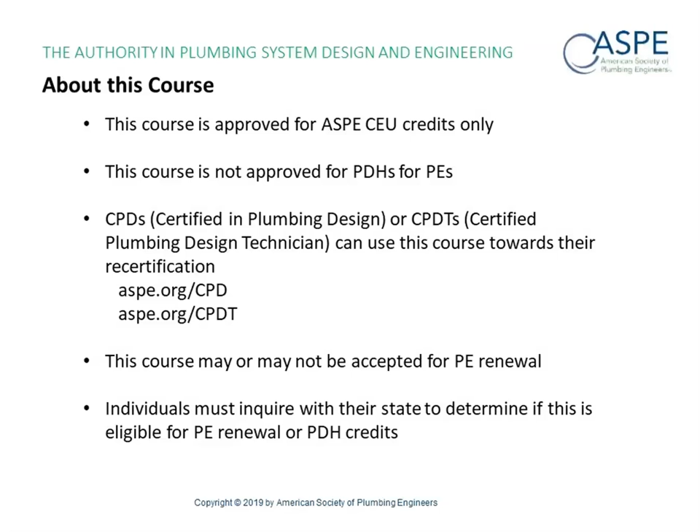So our objectives today: I'm hoping that by the end of the presentation, you're going to be able to list the major causes and consequences of food contamination, identify the primary considerations when selecting drainage for a particular application, analyze and evaluate the performance of drainage materials, describe the unique advantages and benefits of the stainless steel push-fit drainage system, and be able to compare the cost-effectiveness of cast iron and stainless steel drainage solutions.

Go ahead and advance, Jimmy. Jimmy, you want to take this one? This is kind of your baby right here, but I'll be happy to discuss it if you'd like.

Yeah, I think the overall message here is we're talking about hygienic drainage, right? We're not talking about storm drains. We're not talking about standard commercial applications, but rather something that really affects all of us. Everybody on this call is impacted by the subject.

And what we've learned over our time in research is that food contamination is a serious problem. Food contamination affects everybody. 1 in 6 Americans get affected by some kind of food bacteria, food recall, and hundreds of thousands of people are being hospitalized, and thousands of people die because of bacteria in our foods.

And what we're going to talk about today is what that is, where it's coming from, and how we mitigate the risk. Everybody on the call either knows someone or has been affected by food poisoning, bacteria in our food, or some other circumstance. And so it's a problem that kind of affects everybody. So we're going to discuss what that is and how we can prevent it.

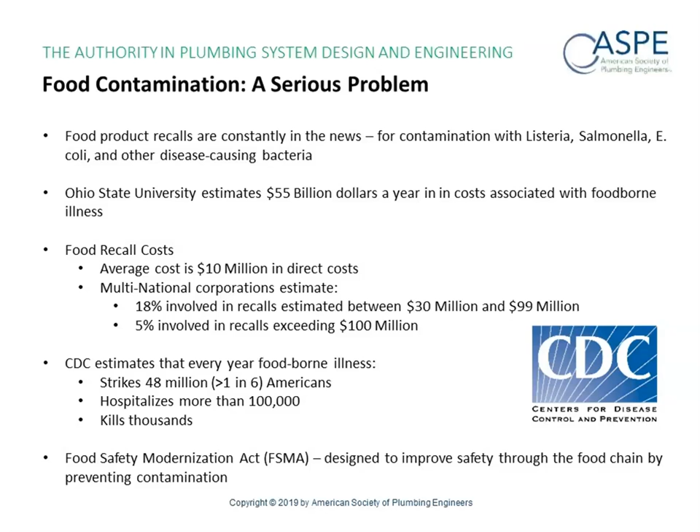Okay, so there's several codes and authorities that have their hands in the cookie jar here. NSF, which we carry the NSF 14159-3A, which is a very stringent requirement for the design of meat and poultry processing equipment. There's HACCP plans in place at most of the food processing facilities. The UPC has taken this, the IPC as well. We already touched on the Food Safety Modernization Act.

Pipes and fittings and drains, you have to comply with the ASME A112.3.1 and ASME A112.6.3. And then we have the ISO 9001. Now, the ISO 9001, in my previous life, I didn't think was a big deal, but that really has to do with continuity of manufacturing. An example would be a particular manufacturer of a type of pipe where, upon closer examination, the outer diameters have variance in them, so they would not connect to the drains properly. So you really are looking for a certain level of continuity when you're dealing with a product. So look for that ISO 9001 wherever it's applicable. Go ahead, Jimmy.

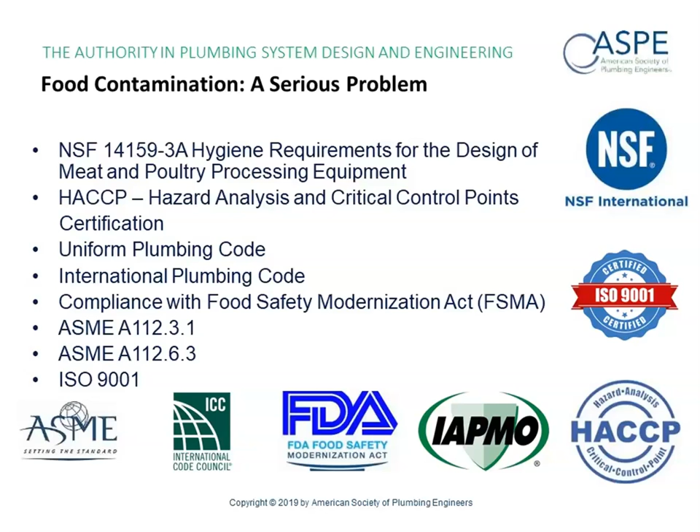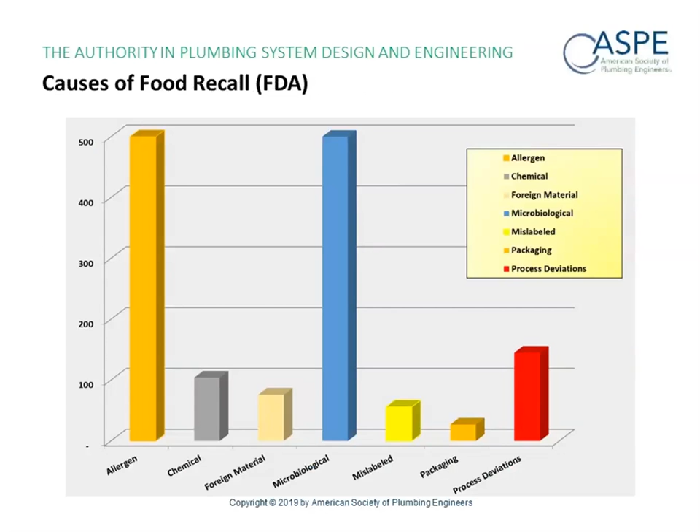Okay, so looking at this chart, you can see that the two leading causes of food recall by the FDA are due to allergen or microbiological contaminants. Now, when we're talking about allergens, that could be something as simple as an undeclared peanut oil or undeclared dairy product in the packaged food. Microbiological is a far more serious problem, so we're going to advance and talk more about that. But before we do, we have our first poll question, one of 5 poll questions that Greg is going to conduct in the WebEx.

Yes, I'm pulling it up right now. Great. So the question is, what is the leading cause of food recall in the United States? Your options are foreign material contamination, allergens, microbiological contamination, or process deviation.

Oh, I got the vote. That's cool. Hopefully you're right. No, I guessed wrong. I wanted to skew the results. Okay, we'll give it about 5 more seconds. All right. Greg, do you want to share the results? Yep. Close the poll here. The WebEx is just giving it a few more seconds. No worries. All right, I'm going to share the results now. Okay, there you go. All right. So

The answer is C, microbiological contamination. So 40% of you answered correctly, thank you very much. That is, in fact, the answer.

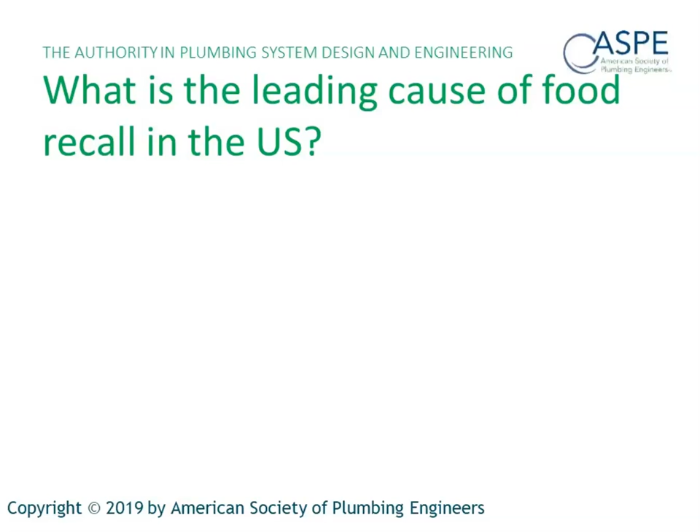Excellent. So 34 of you have just won a dream date with Jimmy Hunt. Congratulations and well done.

So let's talk a little bit about this slide. What we're dealing with here is what is known as WGS in the industry, or whole genome sequencing. I don't know how many people watch the true crime shows at their house, but what they've been able to do is really come up with the technology to isolate and identify the source of food contamination.

So let's say you get sick with some sort of food poisoning, you go into the hospital, a sample is taken, and they detect a pathogen in you. They then run an RNA sequence on it if it's a virus, or DNA sequence if it's a bacteria. And then they are able to take the swab, and that gets entered into a database.

And then there's FDA inspectors and USDA inspectors out in the field that are taking swabs of different facilities. And if they come up with a positive, those are identified, and those are also sequenced in the same way and entered in the same database. So what's happening is they're able now to compare the genomic sequences from these food outbreaks. And what we're finding out is they're able to isolate.

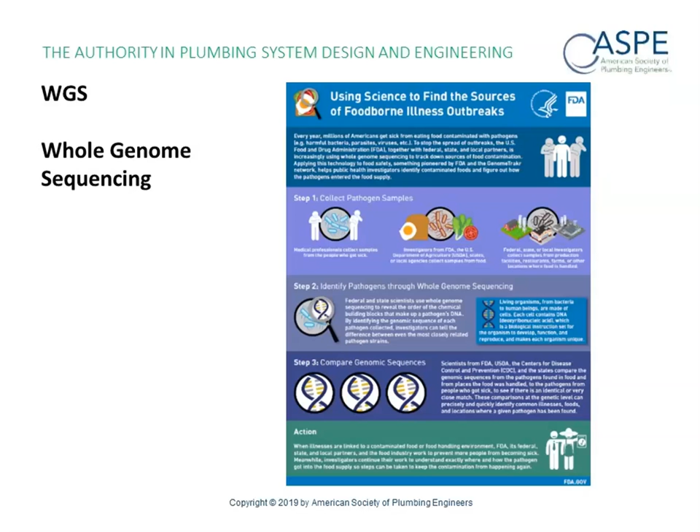So Jimmy in Atlanta gets sick from something, and it actually turns out to be a plant in California. They're able to isolate the source, go back, and then take action accordingly to make sure that that situation is dealt with. So there's really an incredible amount of science and effort going into isolating and making sure that the public is protected. Go ahead and advance.

Okay. So what we're looking at now are the FDA food recalls, which are limited to food, tobacco, medical products, and things of that type. You can see that Listeria in 2018 is still the leading cause of recall through the FDA. The numbers have dropped significantly since 2017. You can see that the number there was 600. And you can see that they've really gone down from 2014, 855, 2015, 647, 2016, 785, 2017, 600, and 2018,

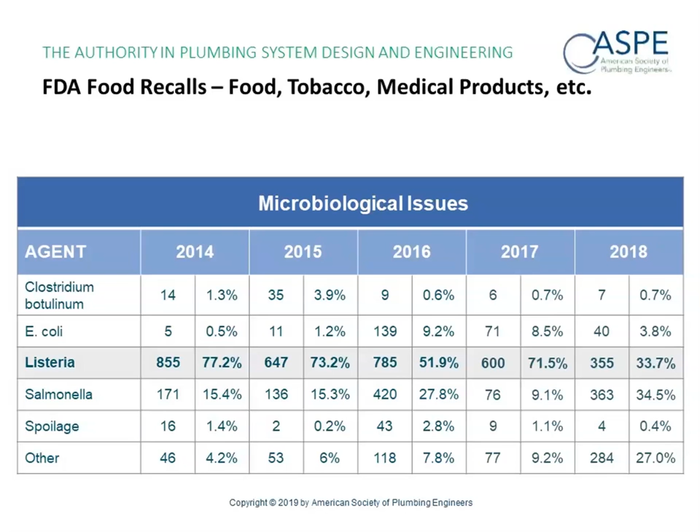355. And that really has to do with the instant identification and isolation of what's been going on in the field. And also, I would say it's a direct result of the HACCP plans, the hazard analysis and critical control points. They're really getting to the point now where we're able to isolate where these things are coming from, what areas need to be cleaned, and what needs attention. Let's go on to the USDA recall and see what they're coming up with.

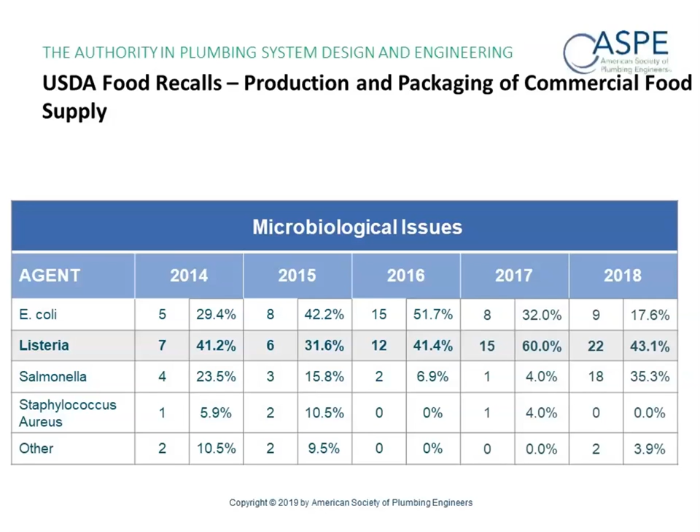And as you recall way back on the first slide, if you're talking a major producer, there have been cases where food recalls have cost in excess of $99 million. That's about 5% of all recalls. Now, that's one heck of a hit for a company to take, and that's how seriously the USDA is taking this. Go ahead and advance this if you don't mind.

So the problem is that when we do this as plumbing designers, and I did this for a very, very long time, is that most of the consideration is what you can see. It's what you can't see that's the problem. Go ahead and advance, Jimmy, if you don't mind.

Right. And as we think about this, where is this bacteria coming from? And obviously it's getting onto the food, but in a lot of studies, the root source analysis shows that the origin of the bacteria is coming from the drain. Go ahead, Scott. Okay. So again, to reiterate that point, the most common harborage site for Listeria is in fact the drainage system.

Cleaning and sanitation programs tend to focus on the obvious food contact areas. So that's when we were talking about FSMA. If you can't see it, it's really hard to clean it. Listeria present in the drains can easily reach food and food contact areas. So what that means is you're basically translocating the source of the bacteria from one place to another.

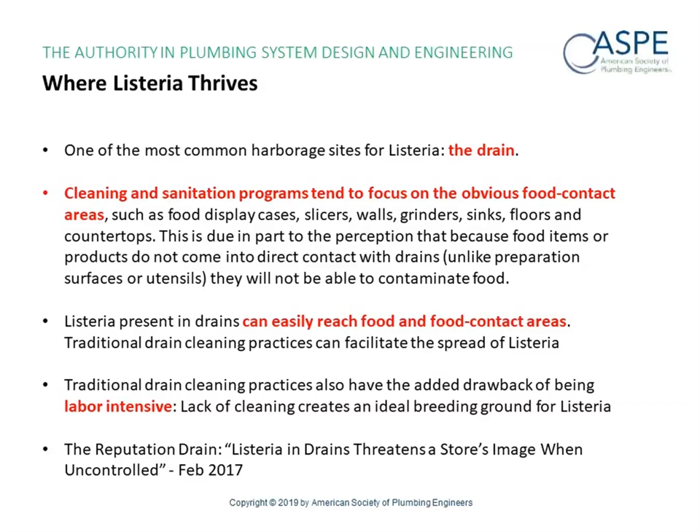Yeah, that gets us to our next poll question. Hopefully you're paying attention. Where do cleaning and sanitation tend to focus on in the typical food production and preparation areas? The answers are sinks, countertops, floors, or all of the above. Where are these cleaning and sanitation people focusing in the typical food production and preparation area? Okay. Poll is open now. You should be able to see it on the right of your WebEx. Give it another 10 seconds. Yeah, and thinking about this question, we discussed the FSMA, Food Safety Modernization Act, and its focus on everything but the drainage.

Okay. Scott, do you want to speak to the answer here? The answer is D, all of the above. Obvious surface contact areas are where cleaning and sanitation tend to focus. They don't really focus on what's underneath the floor. So the correct answer would be D. Let's see what the results should be up now. Excellent. Yep, the results are in. Most people guessed D.

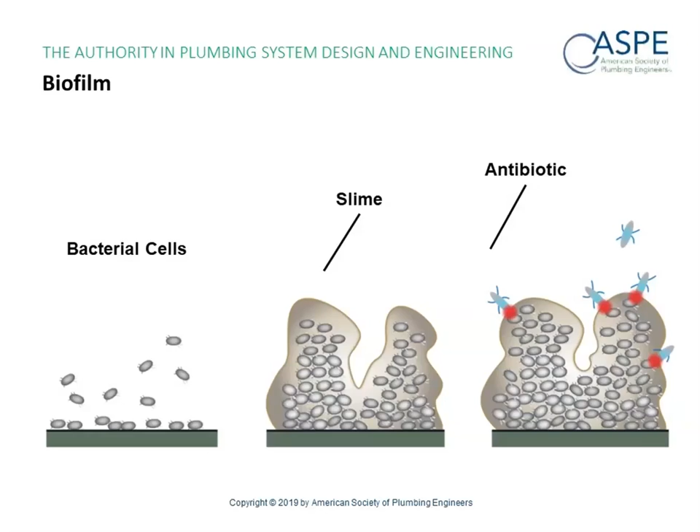Okay, so what we're talking about is what's happening in the piping system and what type of pipe is really propagating this biofilm formation. I do want to preface this by saying that there are other piping systems out there, such as polypropylene and polyethylene. I am working with Watts and some other vendors on trying to get a little bit more data on this to figure out where they fall on the scale in terms of porosity and surface roughness.

I used to think that the coefficient of friction or the surface roughness had most of what was leading to this condition, and I found out that that's not necessarily true. That coefficient of friction isn't always applicable. If you look at a pipe like PVC, which is a great pipe for certain items, it rates very poorly in terms of biofilm formation because it is a very, very porous material.

Second to that, you have asbestos cement and cast iron. Rating somewhere about there is galvanized steel, and then we know that stainless steel 316 in particular rates excellent in terms of the resistance to biofilm formation. And that has to do a lot with the metallurgy and the fact that biofilm does not like to grow on stainless steel. Can it grow there? Absolutely. If you don't clean anything long enough, you can be subject to problems. But just from a material standpoint, it's just not a very hospitable environment for it, which is why it's used.

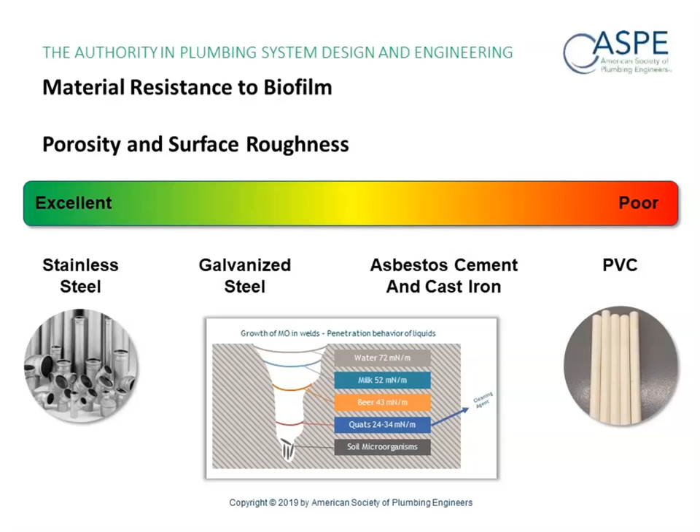I think on the next slide, we have a blow-up of that graph that's on the bottom of this page. Can you advance one slide, please? There we go. Okay, so what are we talking about here?

We're talking about the growth of microorganisms in welds and or crevices. So the rating scale is millinewtons per meter. So if you're looking at a weld seam or a pore in this case, you can see the water penetrates to 72 millinewtons per meter. Milk penetrates deeper than that at 52 millinewtons per meter. Beer, which I'm recommending as a cleansing agent, just not in this, but beer is penetrating to 43 millinewtons per meter. Quats, which is a cleaning agent, gets down to 24 to 34, which is not enough to penetrate deep enough to reach the soil microorganisms.

And the source for this is the EHEDG. Jimmy, what does that acronym stand for? That's the European Hygienic something. Are you familiar with that one? It was a seminar that Mark Hayden went to.

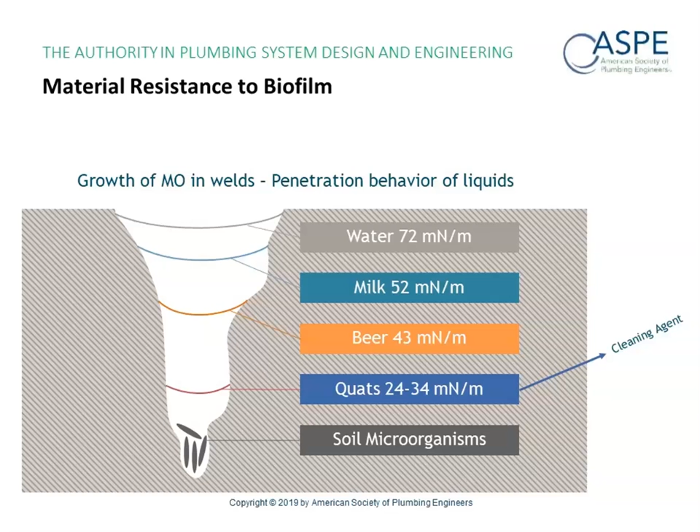But basically what it shows is that the cleaning agents are not getting deep enough penetration to kill these soil microorganisms. So just because you foam, just because you cleanse the pipe or try to disinfect the pipe does not mean you're actually taking care of the issue. Let's go ahead and advance. All right. Unfortunately, this was a three-part click, but we've already clicked through it.

Recent studies have shown that there is an expansion rate of about 4 millimeters per day on that, which means that that bacterial colony is actually propagating and spreading throughout the piping system, and it can literally start in one area. And this is what we're talking about in healthcare. This study was sent to me yesterday, and it came out of Europe, and it says that only 4% of the hand sinks that are provided in the healthcare environment, in the clinical environment, are actually used for washing your hands. So what's going on? What are they being used for? Well, they're dumping biological waste down those sinks, although they're not supposed to. They're dumping leftover food, and what you're doing is you're providing nutrients for that.

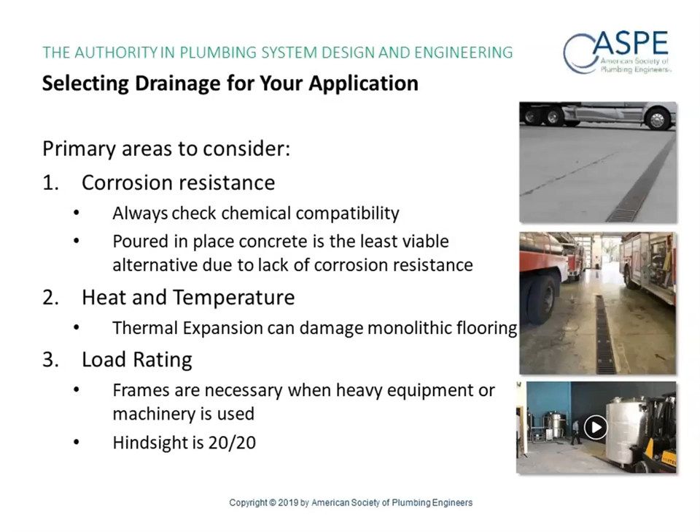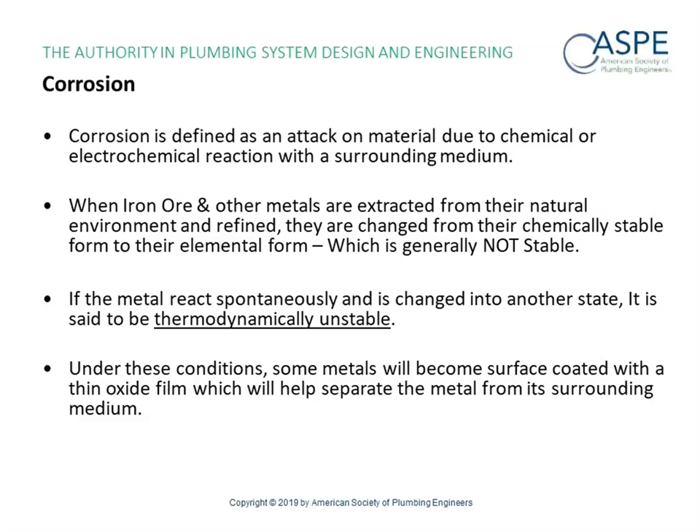Okay, so most of us know what corrosion is, but it is defined as an attack on a material due to chemical or electrochemical reaction within the surrounding medium. When you extract iron ore and other metals from your natural environment and you refine them, they're changed from a chemically stable form to their elemental form, which is not stable. If the metals react spontaneously and change into another state, then that's when it's said to become thermodynamically unstable. And under these conditions, some metals will become surface coated with a thin oxide film, which will help separate the metal from its surrounding medium. And what we're talking about here is chromium oxide in the case of stainless. So then when that happens, it's in a passive condition, the material is passivated, the corrosion resistance is considerably improved.

What we're looking at here is cast. The passivity of cast is relatively small. It does develop an oxide film, which is rust, but unfortunately that accelerates corrosion by forming more iron oxide, which is being extracted from the pipe. So what you're looking for is an alloy with a chromium content of 12 to 13% or more. These are highly passivated and will not rust in ordinary air and fresh water. Go ahead and advance.

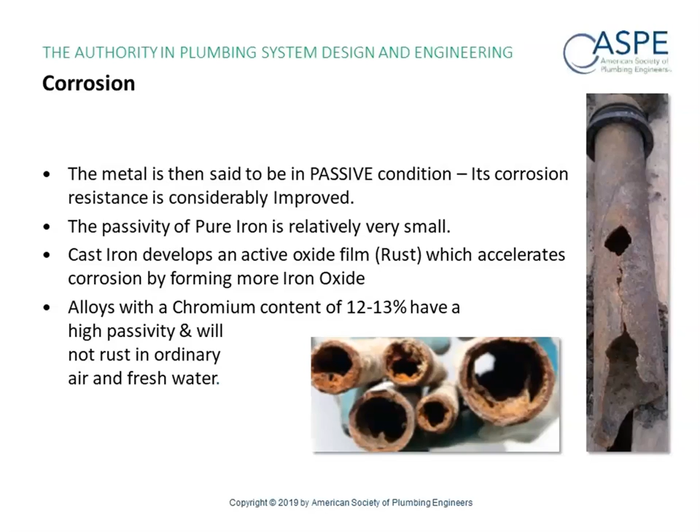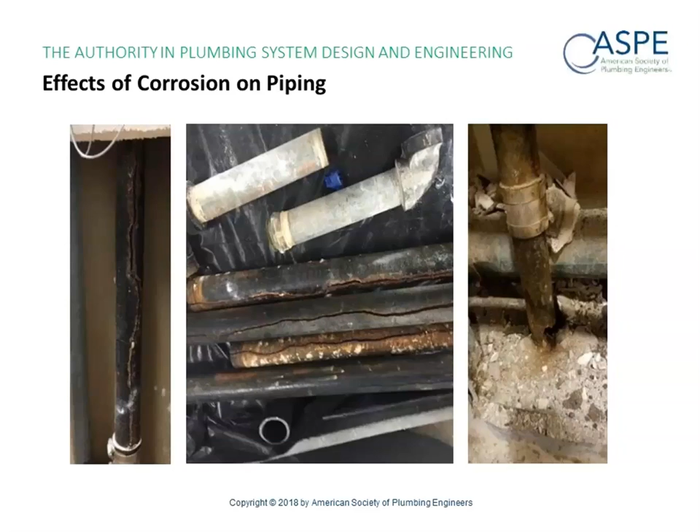Oh, man, this one I love, but it's not active. Okay, so what are we talking about here? This is an example of corrosion in cast iron. And in particular, I do want to mention this because there's a lot of engineers on the call, there's an Appendix M that's being proposed in the Uniform Plumbing Code. That has to do with the further reduction of the water consumption of plumbing fixtures. So what happens when you do that?

The plumbing code tells you that you need to size the pipe according to a fixture unit chart. Well, the fixture unit chart was based on higher flow fixtures. So if you have a pipe and you reduce the amount of liquid flowing through it, that media slows down and you end up with a deposit of solids on the bottom of the piping system because you don't have adequate velocity.

There's this very smart man, who's long dead, Manning. He came up with a formula known as Manning's formula. And what Manning told us is we are looking for a minimum of 2 to 2.5 feet per second in a piping system in order to keep the suspended solids in the medium. In this case, we're not achieving that velocity, so we have a deposit of solids. We then get an anaerobic process with bacteria eating and decomposing these solids, which off-gases hydrogen sulfide.

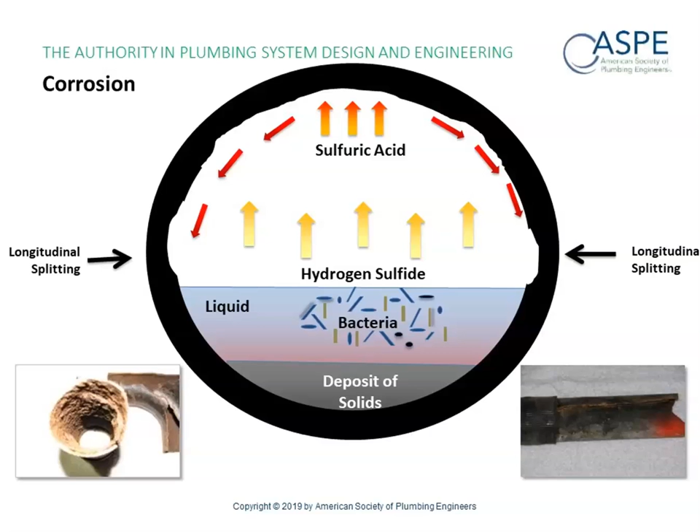Anyway, that hydrogen sulfide being lighter than air rises to the top of the piping system, and it condenses and forms sulfuric acid. That sulfuric acid coats the inside of the pipe, hits the top level of the liquid, but having a very low specific gravity, it sits on top. And if you don't have adequate flow, you end up with a longitudinal splitting in your piping system because that sulfuric acid is eating away at the interior of your pipe. Go ahead and advance, Jim.

That actually brings us to our next poll question. You saw a lot of pictures in the previous slides of that longitudinal splitting. And of course there's microbiologically induced corrosion as well. But this question is, what formula pertains to the flow of liquids in a sanitary waste system? Your answers are Hazen-Williams, Darcy-Weisbach, or Manning's equation. Oh, we spelled it wrong. Give it another few seconds.

Well, Scott, you're doing a heck of a job because it seems like everybody got the right answer. That's answer C, Manning's equation or Manning's formula.

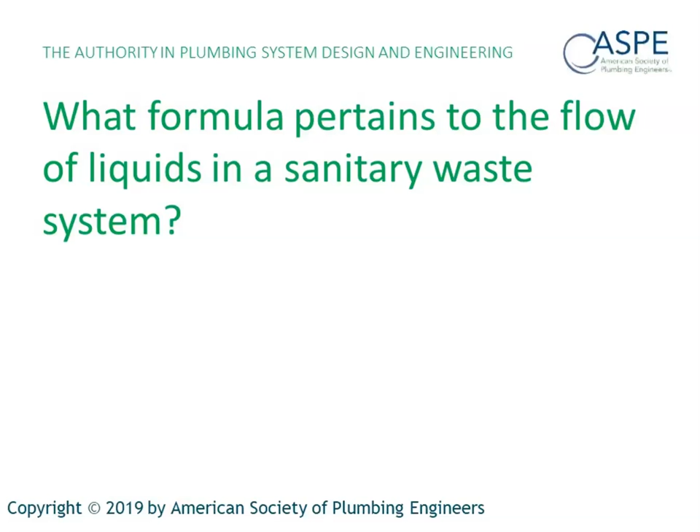Manning's equitation? Yes, equitation. Excellent. Thank you for pointing out all of the flaws in this presentation. Well done. Somebody's got to do it. I'm glad I was able to fulfill that role for you.

And again, I want everybody on this call to understand that I am not criticizing the cast iron industry. Cast iron has been a reliable, good source of plumbing waste for quite some time. I always tell people, if you want to use cast iron, if you want to use a hybrid system, let's say you're doing a commercial kitchen and you're connecting to a bunch of lavatories or restrooms outside of that area, that's fine. That's what you do.

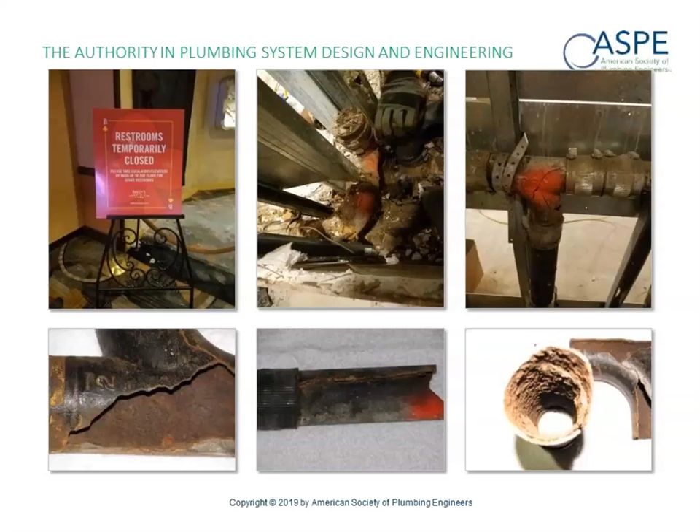But again, I do want people to understand that I'm not saying not to use anything. I'm not saying not to use plastics. Everything has a time and place. Just make sure that you're using it for its correct application. In this case, what we're talking about is ultra-hygienic applications. So you need to keep the bacteria out of the drainage system. So I just wanted to stress that.

If there's anybody on the line that's with another company or represents another piping system, you guys are great. We love you. We like to use you in the right place. So that's the entire point I'm trying to make here.

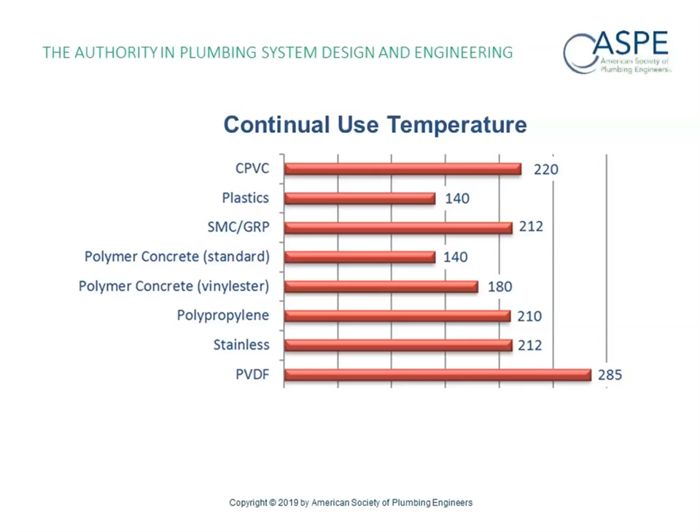So let's look at some continual use temperatures. You can see that PVDF goes up to 285 degrees. Stainless is showing 212, and that's really limited by gasketing materials because the melting point on stainless is a lot higher. But this is just a graphical representation of most of the continual use temperatures. In particular, you look at plastic, and it's 140 degrees.

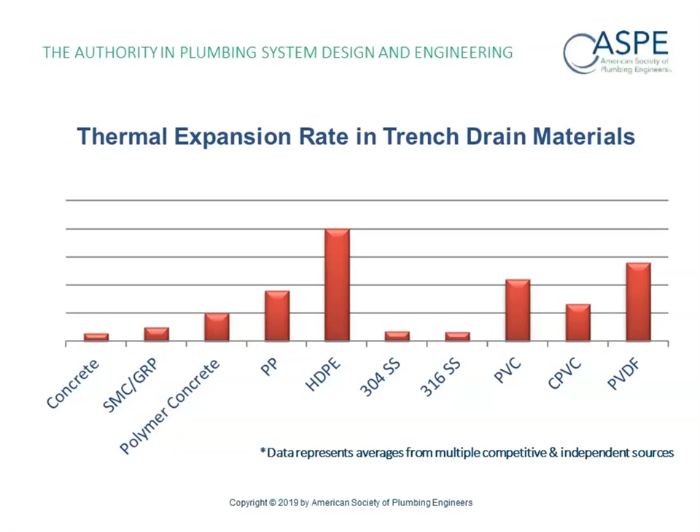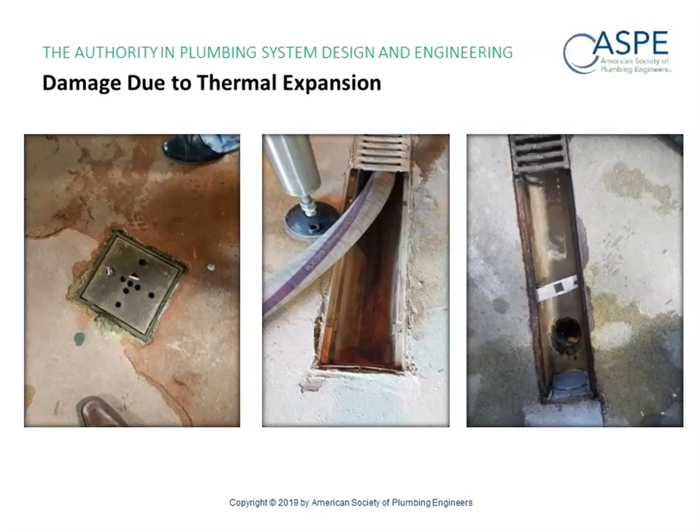I have to approve your expenses, Scott, so it's coming out of your own pocket. No, I was actually going to put it on your card. I took the liberty of swiping it.

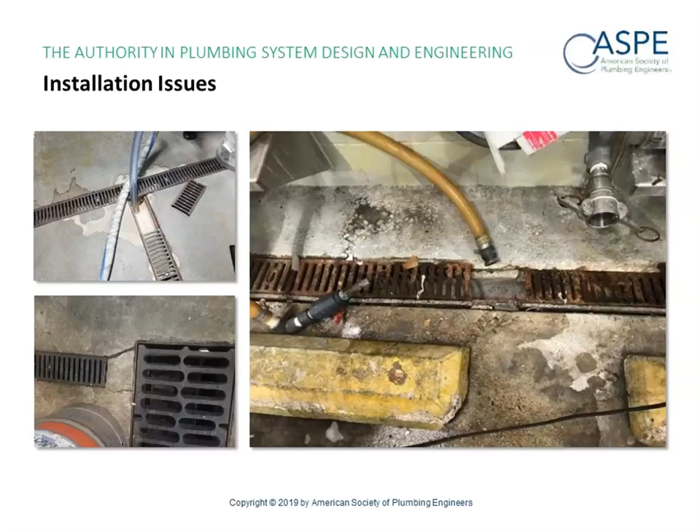The one on the right here is a very clear separation of the epoxy from the surrounding cast trench. So that goes without saying. And then you can see the oxide film directly on the material itself. So again, we're showing more corrosion. The one on the left, interestingly enough, is Great Divide Brewing.

You remember that place, Jimmy, with the little hook game? Yeah, we promised we wouldn't say names, but it's done now. Oh no, they're fixing it. I'm talking to them now. That's why I'm saying their name, because they know it's a problem and they're actually fixing that now. I was just trying to see if you remembered that particular brewery. I do remember. All right, we can go ahead and advance.

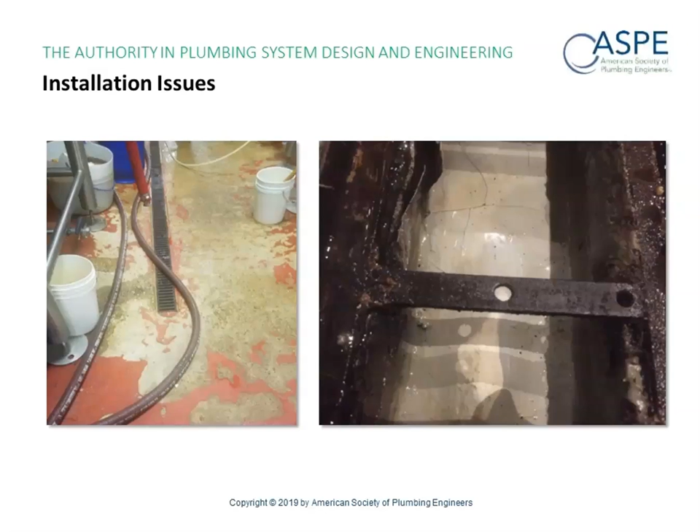But before you do, Jason Hawking has answered correctly. The hose in the trench drain is not permitted by code. You need to provide an indirect connection. He's $50 richer. Who was that? Jason who? Hawking.

What we're looking at here is there's two different standards. There's a DIN standard, which is a European standard. What we need to comply with is the ASME A112.6.3. That is the applicable code in the U.S. And those grades are rated either light duty, medium duty, heavy duty, extra heavy duty, and special duty. So you want to make sure that, and it goes back to one of the original slides, what traffic is expected over the drain.

Pallet jacks will thrash a drain. If you're using a light duty drain and you're rolling pallet jacks over it full of product, you're going to deflect that grate, and you are going to cause bending. So just make sure that you are getting the correct rating, and always look for the correct ASME standard on whatever it is that you're working on.

The point, you have the wrong selection of drainage. You've got heavy-duty things going over it. It cracks. It separates. We saw some examples of that. Then you've exposed your drainage system to open areas, water flowing between the drain and the floor, corrosion, bacteria being created between and underneath the drain.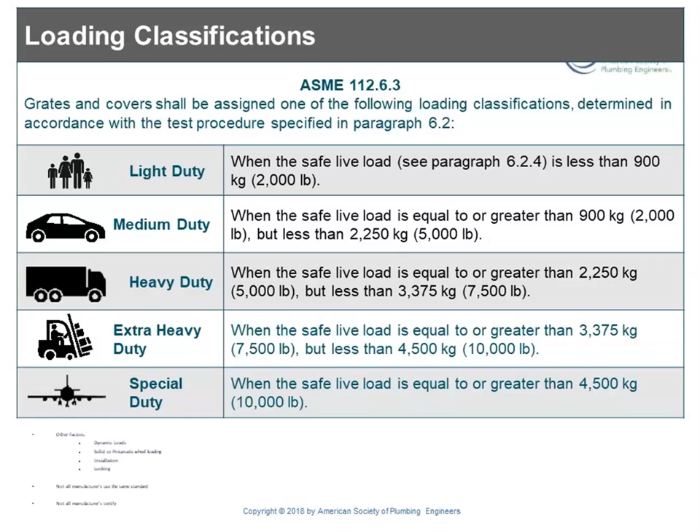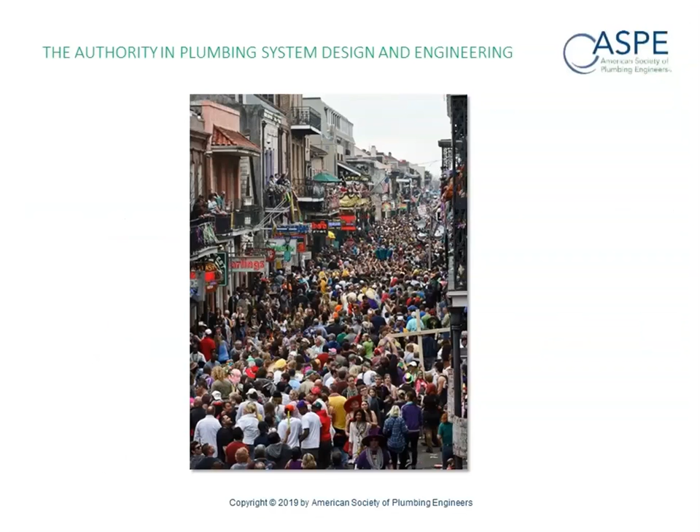So this particular pipe failed during Mardi Gras. So they had to shut down the entire kitchen of one of the casinos down there, and they lost a lot of money as a result of it. So we were talking about, on the first slide, what's really the problem with contamination or pipe failure? It's not only the cost of the food recall, but it's production downtime. So if you're pumping out product and you lose half of your production time, not a good thing. So again, an ounce of foresight is worth a lot when you're talking about these things.

Actually, let's back up. We didn't go over the pros and cons. So what are the pros of using cast iron? High compressive strength, and it is appropriate for many, many applications, as we've talked about, and the low amount of thermal expansion and contraction. The con, it's not good for food processing, sanitation.

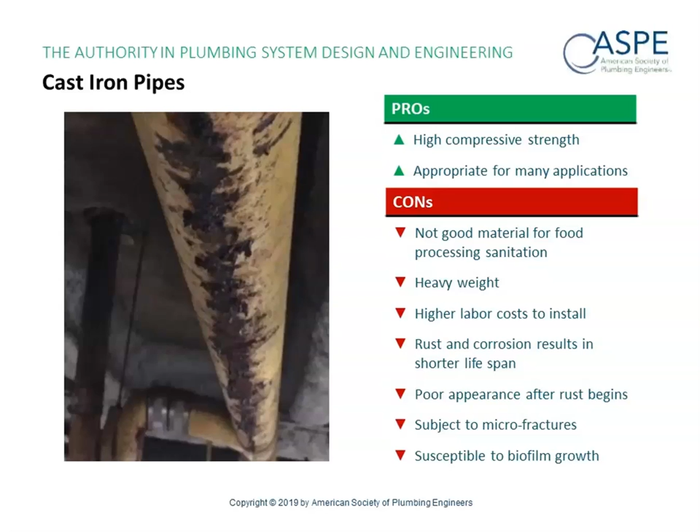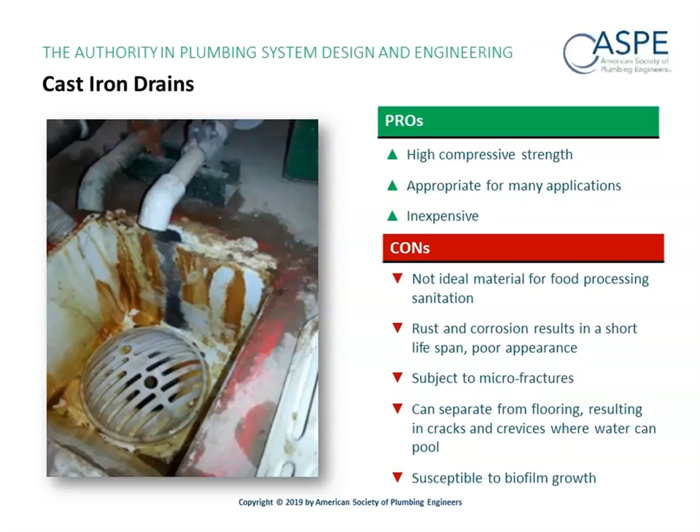So if you're dumping condensate or any type of corrosive in there, water will seep through because, as Jimmy already said, water finds a way, and it will seep through those microfractures and then start peeling off the enameling. So the cons here, you can tell that is not ideal for food processing. Same problem with rust. We talked about microfractures, and we talked about the separation from the flooring and susceptible to biofilm growth. Go ahead, Jimmy. I'll let you take plastics.

All right, so we've talked a lot about cast iron. We've talked a lot about different issues and troubles and solutions. And the most common type of solution we're seeing now in food processing kitchens is PVC and CPVC. Now, we already discussed that there are benefits. Obviously, it's very lightweight, it's inexpensive, it doesn't rust, right? So we have that benefit.

However, we talked about porosity, and it's an incredibly porous material, therefore susceptible to biofilm formation, which is where that bacteria grows, right? Well, that's only limited to the PVC.

CPVC has a different level of porosity, so you could say that definitely applies to PVC. CPVC has its own issues. All right, so the point is that because it's plastic, it has temperature limitations. We talked about the continual use temperature of PVC being 140 degrees, and when you're in kitchens, breweries, food processing plants, you will find higher temperatures going down the drain, and the plastics will actually start to soften at 33%

of its melting temperature. So what you're seeing here in this picture is from a brewery in the Midwest. That's underneath the flooring, obviously. This particular brewery has never seen anything over 180 degrees go down their drain. They measure everything going through. But because of the softening, you see that there's little to no flow going through that piping because it's warped. And so now liquids start to form on the floor, and you have standing water and ultimately drainage backup as a result.

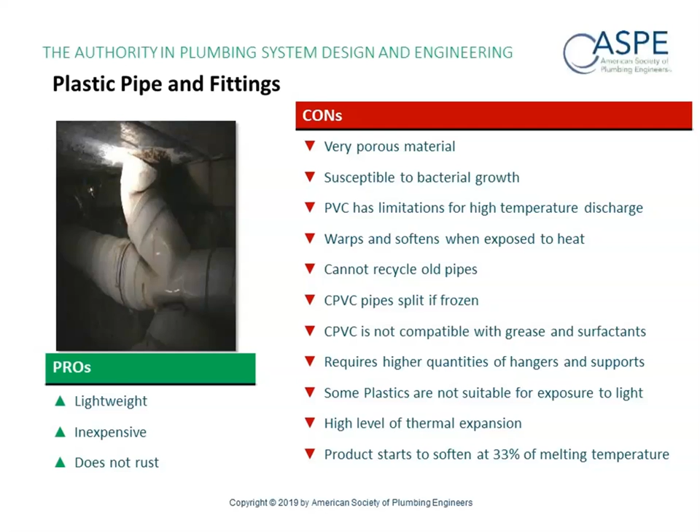Okay. So we've talked about the most common types of drainage, and most likely everybody on this call sees either plastics, cast iron, or stainless as the most traditional types of drainage. What we're talking about specifically is stainless steel drainage. Stainless steel has higher use temperatures. It's less likely to have biofilm formation because of porosity. It's durable and doesn't corrode in most applications.

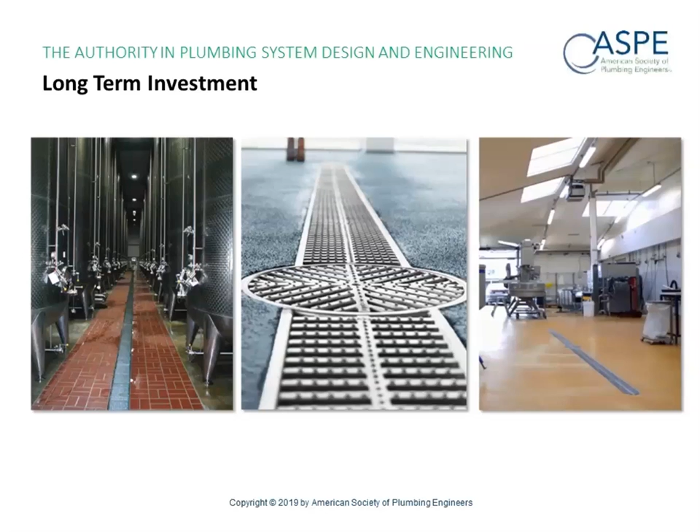So it's something that you'll spend more money on, but you'll have peace of mind and understand that it is the ideal long-term solution. It's one thing to pick something less expensive today, but as a very astute engineer once told me, cheap is expensive. So what we're looking for ideally.

Go ahead, Scott. Okay, well, why don't you let me take this, Jimmy, because we've only got about 7 minutes left, and I think we have quite a bit to cover.

So the ideal solutions are durable, hygienic, easy installation, sustainability, and ROI, so you're looking for that return on investment. So what would a solution that eliminates issues from the past look like?

Go ahead and advance. I can't advance the slide. Can you do that? Okay.

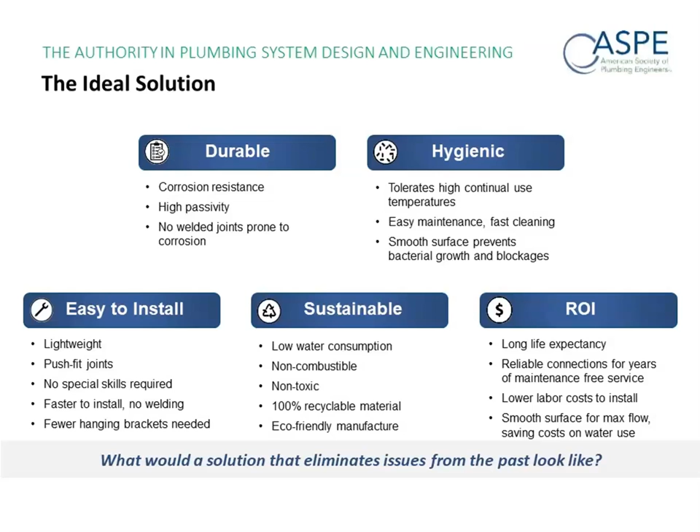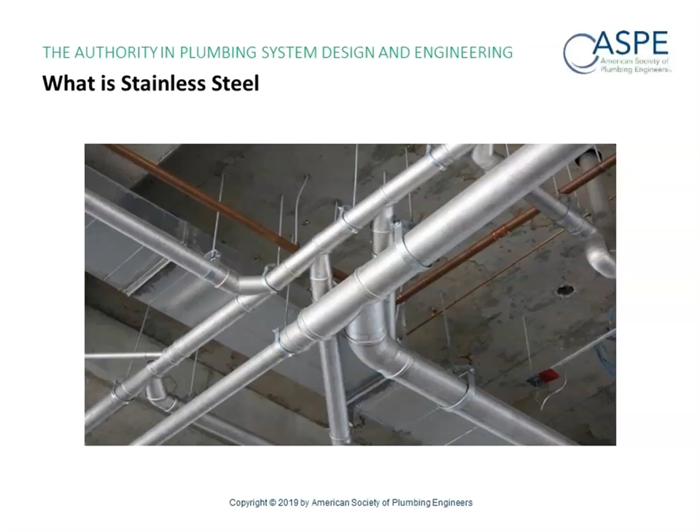So here's stainless steel. This is what an ideal solution would look like. This is a hygienic system, easy to install, sustainable, and gives you an excellent ROI. Let's go ahead. Okay, so stainless steel piping drains in the U.S.: you're looking for 316L below grade, 304 above.

The advantages are non-combustible, very resistant to corrosion, hygienic, ROI, long product life expectancy, quick installations, easy maintenance, multiple joint options. There's joint clamps, transition couplings, all kinds of things we can do there. Lightweight, many sizes and custom solutions are available through either us or any of the competitors, a full range of DWV pattern fittings, and sustainability. You can achieve LEED points with these.

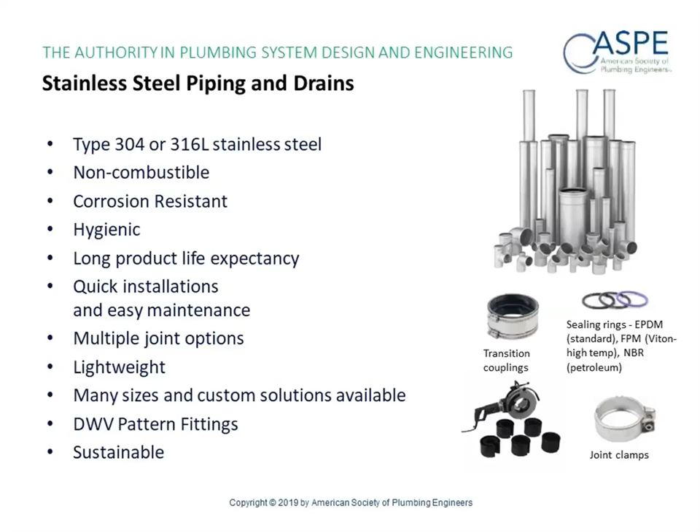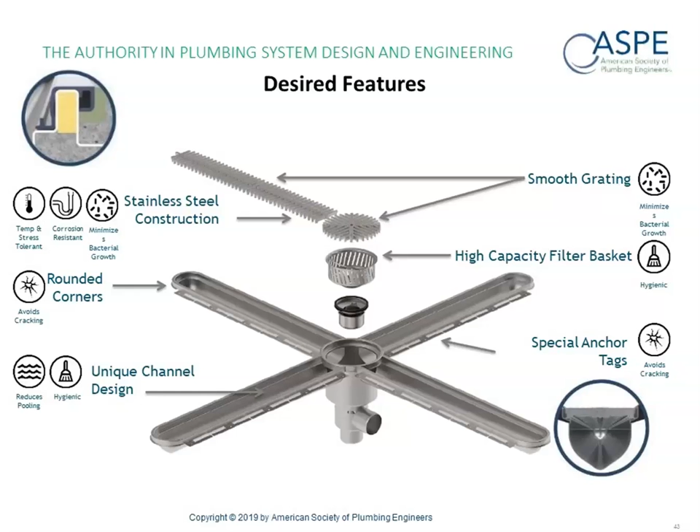Anchor tags, so when you pour your trench into the concrete, you want to have it grab onto something. So you can push down these anchor tags and it'll grab on. And a high-speed channel design, because that will save you a lot of water. Any debris that falls into the trench finds its way into a minimal waterway, which enables it to flow out much faster.

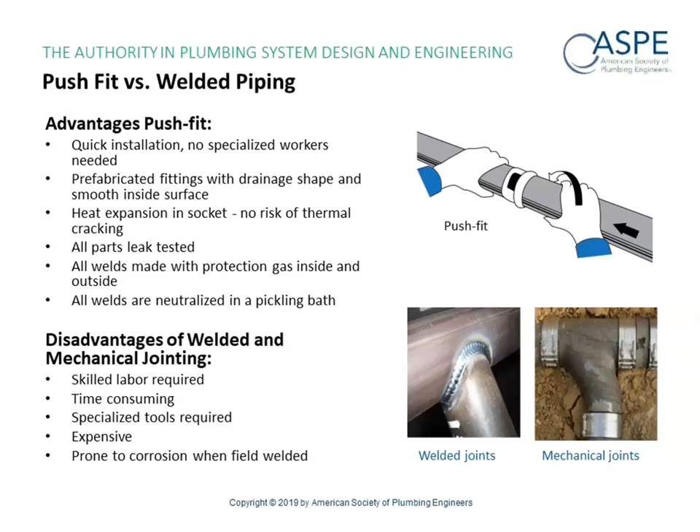You do have to have two people there, one guy welding, one on fire watch. It's expensive, and it's prone to corrosion when field welded. So why is it prone to corrosion when field welded? The process of welding stainless steel pipe removes the chromium oxide film that we were talking about, the passivation. So unless you have the chance in the field to repassivate that piping, what you are creating is an Achilles heel in the system. So just by the act of joining the pipe and not passivating it, or not allowing it the time to passivate, that's the weak spot.

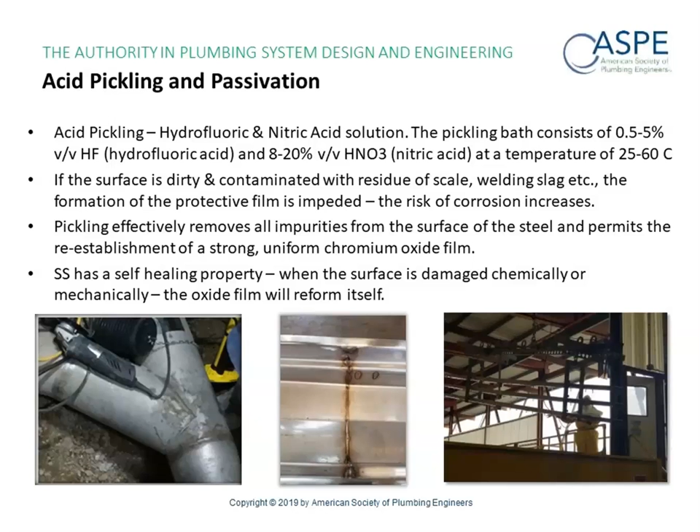So as to pickling and passivation, you take all welded corners, all welded fittings, and you submerge them in a hydrofluoric and nitric acid solution. If the surface is dirty, which it usually is, with residue, scale, welding slag, the formation of the passivation or the chromium oxide is impeded. So that increases the risk of corrosion. So the acid pickling process removes all the impurities from the surface of the steel and helps form that chromium oxide film again. We know that stainless steel has a self-healing property, so when the surface is damaged chemically or mechanically, eventually the oxide film will reform itself if it has time to do so without being further corroded.

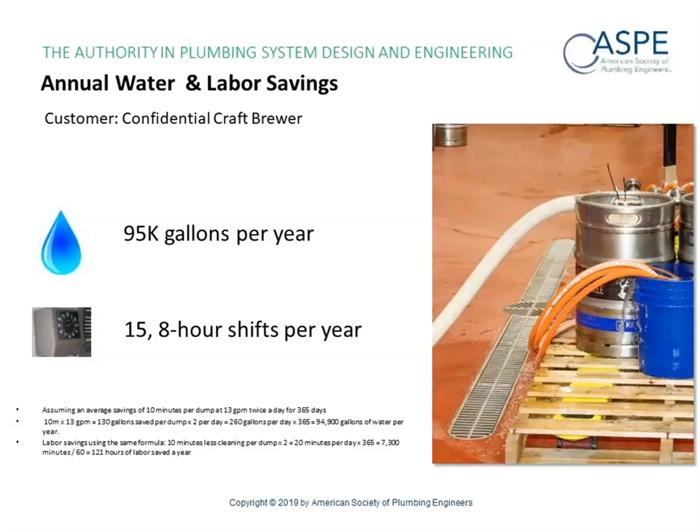So here's a good example of savings with a high-speed channel. This was a particular brewery that we did, and we took a look at it and saw that there was an average savings of 10 minutes per dump cycle at 13 GPM twice a day for 365 days. So we did the math. 10 times 13 is 130 gallons saved per dump, twice a day, or 260 gallons per day at 365 days a year. So they saved almost 95,000 gallons per year. So that is an ID point that you could also get through LEED if you want to substantiate your claim, and we can help you fill out that paperwork. We can look at the labor savings as well. Oh, never mind, we could go on, but there were significant labor savings.

So what is the cost of a push-fit stainless steel piping system over a traditional cast iron system? I believe this is a poll, so we'll give you a few minutes. Yep. This is our last poll of the WebEx. So the question is, what is the cost of a push-fit stainless piping system over a traditional cast iron system? The options are 2 times, 3 times, 4 times, or none of the above. There you go. It should be up right now. It's up. So everybody on the call, is it 2 times more, 3 times more, 4 times more, or none of the above? Give it a few more seconds. We've got some astute listeners here. The answer, of course, is none of the above. And we're going to move on and explain the logic behind that statement.

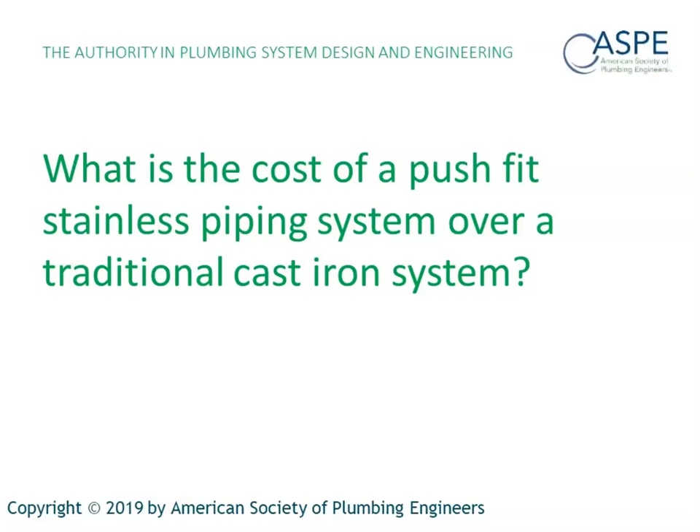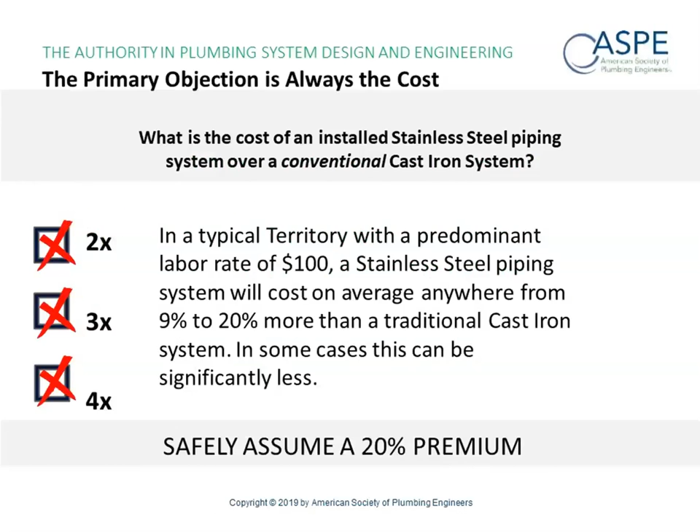Okay. So what we look at is in a typical territory with a predominant labor rate of $100 or more, stainless steel piping will cost on average anywhere from 9 to 20% more than a traditional cast iron system. In some cases, this can be significantly less. What I tell people when they initially call me is always assume a 20% premium, even though it can be less.

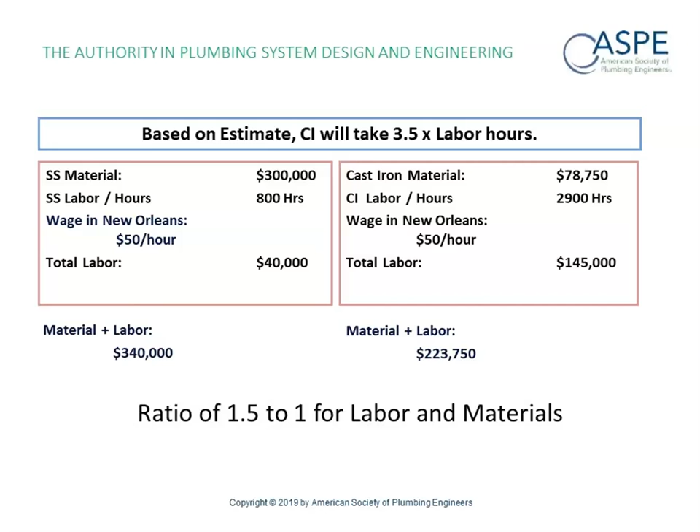So here was an interesting job down at the Orleans Parish Prison. You could see that the ratio was 1.5 to 1 for labor and material. So the cast iron material, I think there's a typo here somewhere. Nope, we're good. Go ahead, Scott. Something's not right here, but you can see that the labor total for cast iron was 145, and the labor total for just the push fit was 40,000. But keep in mind that the predominant labor rate down there is only $50 an hour, or was at this time. So the material and labor cost was $340,000 in New Orleans and $223,000 if they had used cast iron.

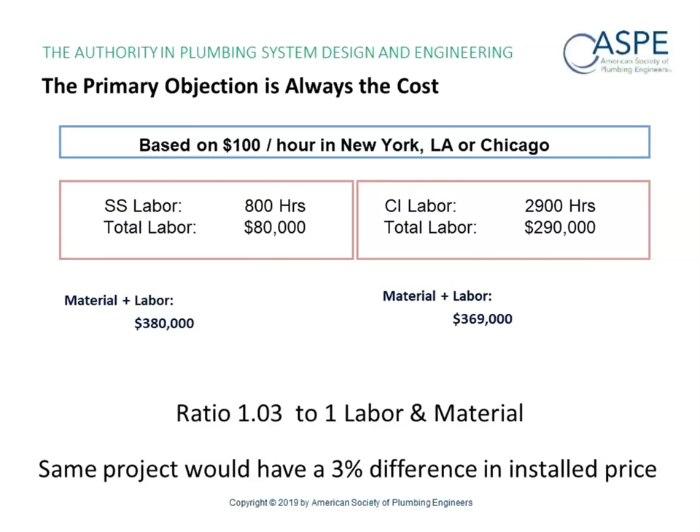Now let's take that to a major market, LA, New York, Chicago, and apply the appropriate labor rate. You could see that there was a 3% difference. All things being equal, if the only thing that changed was the labor rate, there would have been a 3% difference. And we're talking a 70-year product under standard corrosion conditions versus the relatively short lifespan of cast. Here was a job that was done up in Northern California. The engineer put this together, and you could see an 8.9% variance on this.

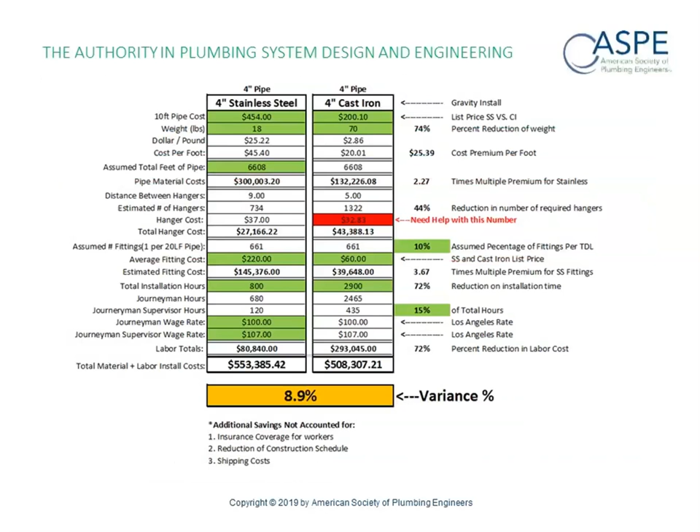So we'll just get past that one. And mainly it has to do with the amount of hangers and supports and the time necessary to make joints. And this is going to be what I believe is our last slide, or second to last slide.

And this is what I want to leave all the engineers with, is that you have the ability if you write a spec, and there is now case law in place. This was written by Steve Noodleman. Whoever gets PME magazine knows Steve writes a lot of legal articles. And what this case basically showed was that there was a company that specified a particular product based upon the performance of that product for the application. The contractor took them to court over it because they wanted to do a value engineering process on this.

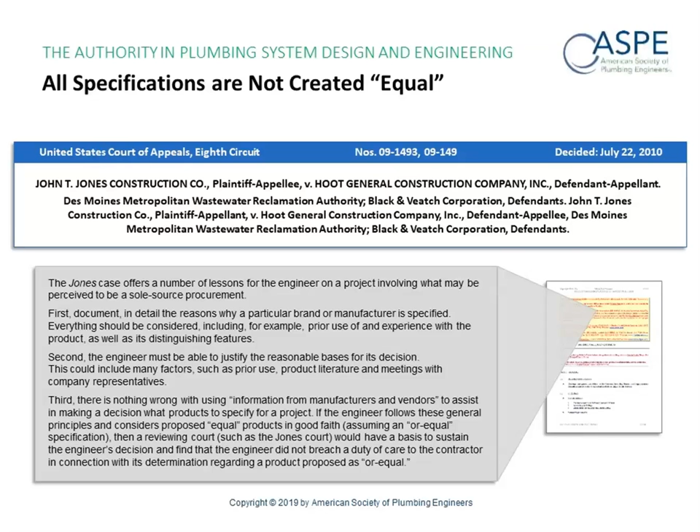The engineer did not back down, and the engineer actually won this case because it's the engineer who is accepting the legal liability for the protection of the health, safety, and welfare of the public. So you have the powers. So not all things are created equal. Go ahead and advance.

And I hope you learned this stuff. We did very well on the polls, so it looks like everybody did very well. And with that, I will leave it to Jimmy Hunt to close out. And again, I thank you very much for your time and attention, and I'm trying to be as respectful of your time as possible. So, Jimmy, you want to bring us home? Yeah, thank you very much, Scott. You did a wonderful job.

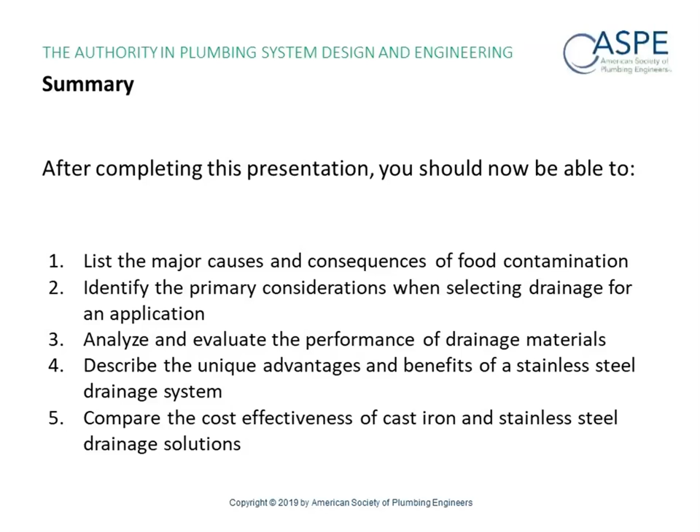I think you made some very solid points, and hopefully everybody took away these 5 learnings and understand that stainless steel, push-fit stainless steel isn't an all solution for everything, but if you take anything away, understand that there are application-specific solutions, especially when you're talking about food process, kitchen, healthcare, sanitary applications. You need to look really seriously at what you select. And with that, Greg Jackman.

Yes, thank you, Jimmy. We did have one question come through on the chat here regarding the last poll. Does that poll question include labor costs? It does. That's total installed costs of push-fit stainless versus cast iron. It's labor, material. The total difference is between 9 and 20%, depending on location, application, et cetera. And it is absolutely predicated on labor.

Because if you just look from a material standpoint, I can safely say that stainless steel push-fit systems in 316 are roughly 300% higher in list price than other systems. So that labor is the key to what makes this system affordable and gives you that return on investment. So that is a very good question, and yes, it is absolutely predicated on labor. Great.

Excellent. Another question that came through here: is cathodic protection for underground stainless steel necessary? Can you ask that question again? So does it require cathodic protection? The answer is no. Okay.